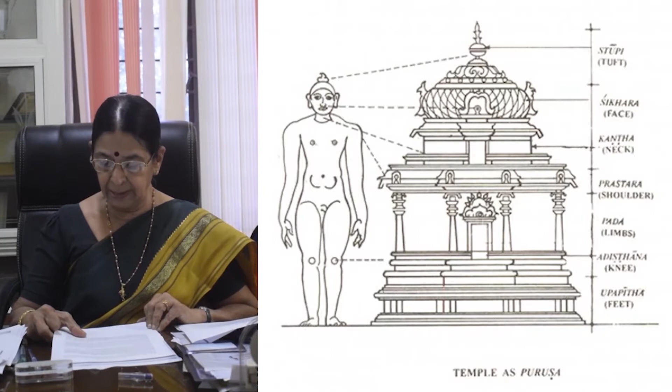The names of the limbs of the body are hence applied to denote the different parts of the temple structure, especially the Srikovil, such as Upapitha, feet; Adhisthana, knee; Pada, limbs; Prastara, shoulder; Kantha, neck; Shikhara, face; Stupi, tuft.

The Garbhagriha contains the life of the temple. It is considered from inside and visualized from outside. The ruling idea of unity is expressed in the harmonious relationship of spirit and body.

Planning of the temple. The temples occupy the central portion of any town planning scheme. In a schematic diagram of a town, as shown in the figure, the town is divided in Paramasayika Padavinyasam, 9 into 9, and the central 9 padams consisting of the Brahmavidi is set apart for the temple complex.

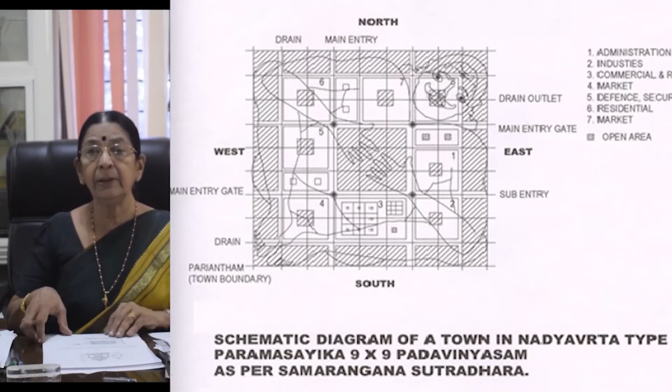There can be seen regional variations in the plan. The fort in Thiruvananthapuram is a good example of a planned city. It is planned in the Asana Padavinyasam, 10 into 10. The entire fort is divided into 100 padams, and the temple of Sri Padmanabha Swami occupies the central 4 padams, as given in the figure.

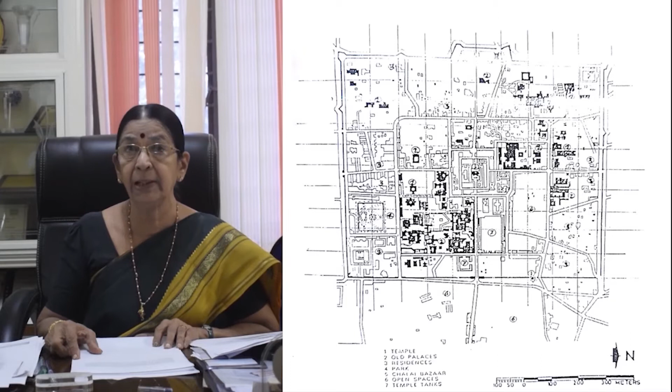Same is the case of Thripunithura. The original plan of Thripunithura is in Asana Padam, with the temple occupying the inner 4 padams. The extent of the temples and the entry points shows regional variations.

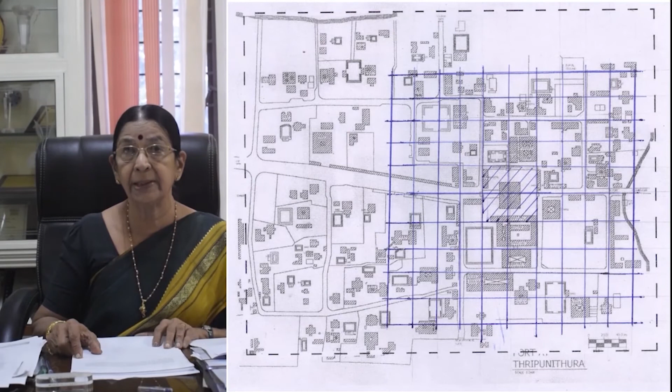In normal cases, there will be 4 entry points at the cardinal directions with the Gopuram, as seen in Padmanabha Swami temple. But in case of the Purnatrayisha temple, there are only 3 Gopurams. The 4th entry is towards the Uttupura on the northern side.

In Kerala, temples are planned as per the technical text Tantra Samuchaya, written by Sri Chennas Narayanan Namboodiripad in the 15th century. This text can be taken as a handbook for construction, where all technical data given in various scriptures are consolidated with the specific requirements of ancient Kerala.

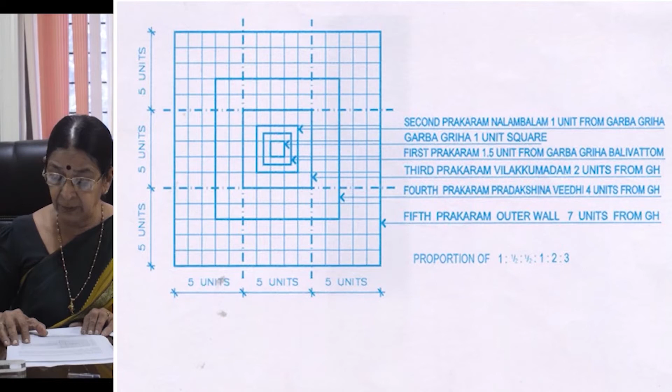As per Tantra Samuchaya, the structural temple is divided into 3 spaces: Antarhara, the inner space; Madhyahara, the middle space; and Bahirhara, the outer space. Antarhara consists of Antarmandalam and Nalambalam and is confined to 3 into 3 Padavinyasam, 9 padams. The Madhyahara space within the Vilakkumadam is confined to 5 into 5 Padavinyasam, 25 padams, and the Bahirhara consists of Pradakshina Veedhi and is confined with 9 into 9. The outer wall, Maryada, is confined within 15 into 15 Padavinyasam as given in the figures.

As described earlier, the plan of a fully developed temple consists of 5 boundaries, Panchaprakarams. The innermost pragaram is the Antarmandalam, which consists of the sanctum and Balivattom, the space confined within the 10 bellicles representing the Ashtadikpalakas and Brahma and Ananda.

The Ashtadikpalakas occupy the respective places in the cardinal points. Of the additional 2 bellicles, one representing Brahma is provided on the eastern periphery away from Ishana, that is northeast, towards Indra east. The second one representing Ananda is provided on the western periphery away from Nirriti, southwest, towards Varuna, west. The 10 bellicles occupying the periphery of the Mandala confirm the concept of the universe and its physical manifestation in the temple design. The second pragaram is defined by Chuttambalam and Nalambalam.

The space within the first and second pragaram is the Antarhara, where entry is restricted for devotees and activities associated with the rituals only will be conducted. The third pragaram is defined by the Vilakkumadam, which is the Madhyahara. The periphery of the third pragaram is also provided with 10 bellicles, which reasserts the concept of the universe. Every temple, including the smallest one, will have all 3 pragarams.

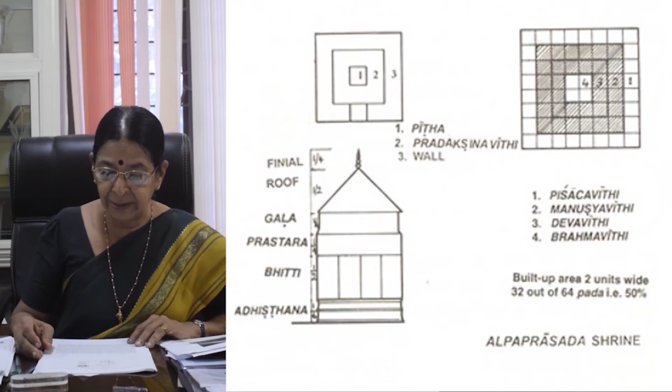The central padam is the Pitham, where the idol is placed. The surrounding Pradakshina consists of one padam width. The remaining one padam is the Bhitti around the inner space. Different padavinyasams are adopted in the planning of Sri Govils, as given in the figure.

Scale of the temple. The standard measurement used in the Vastu Shastra is known as an angulam and multiples of it. Angulam, which is the basic dimension, is decided on the following scale starting from Paramanu.

Paramanu is described as the size of a minute aerosol particle seen in a dark chamber when the sun's rays creep into it. 1 angulam is equal to 2,62,144 times of a Paramanu. 8 angulam makes 1 padam and 3 padam makes 1 kol, which is the standard scale used in Vastu Shastra.

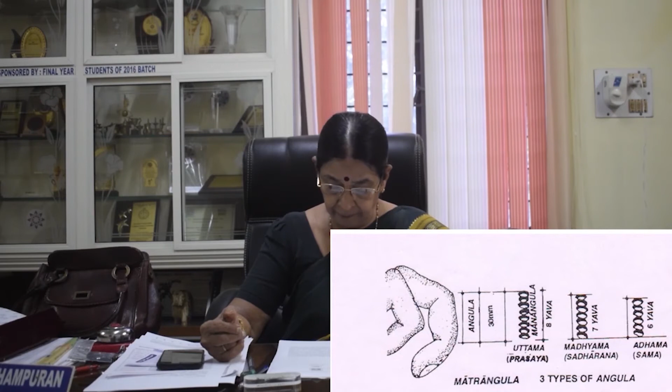In residential buildings, the proportion starts from the angulam, which normally is the measurement of the middle portion of the middle finger of the master. This is known as Matrangulam, proportionate angulam, as given in the figure. This is cumbersome as the measurement of the scale changes from building to building. To avoid this, a standard scale is adopted, which is known as Manangulam, standard angulam.

Legend says that this standardization was effected by Perunthachan, who has inscribed the measurement of 1 kol, equal to 24 angulams, on the 2 jambs of the door of the eastern Gopuram of Lakshmana temple at Moozhikkulam near Perumbavoor. The measurement on the north jamb is followed in the north of Moozhikkulam, and that on the south jamb is followed in the south.

But the scale used in temple construction is that of proportions. Proportionate scale is used in temple construction. The scale used in the construction of temple is related to the size of the idol and the pidam, where the idol is placed, which in turn decides the size of the Garbhagriha.

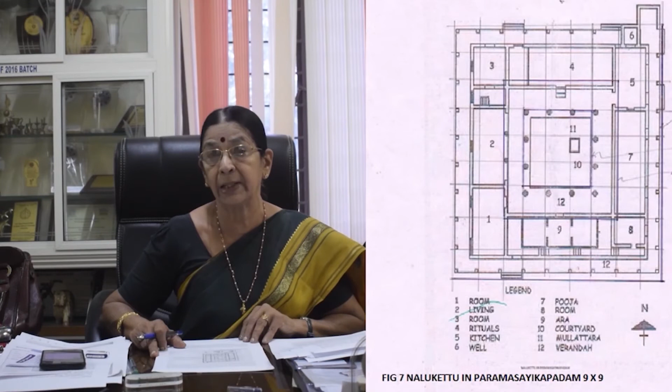The Nalukettu in Tripunithura, Puthen Bungalow, where the Sreekovil of the Paradevatha of the Kochi royal family is constructed in the courtyard of the Nalukettu, is very identical to the Kerala temple. The Nadumittam and the veranda of the Nalukettu consists of the Sreekovil and the Balivattam.

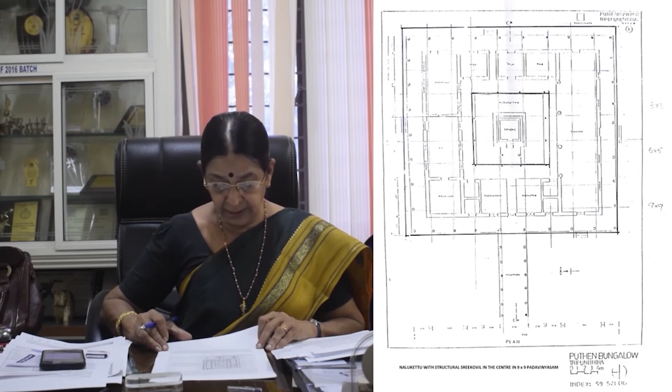The Kizhakkini is provided for the temples of the Upadevathas. The Padinjattini acts as the Edanadi and Valiyambalam. Vadakini accommodates the temple kitchen and space for conducting rituals, and the Thekkini is left open.

The general plan of a temple, as shown, is also in a Paramasayika Padavinyasam of 9 into 9, clearly showing the similarity of temple planning and the residential building.

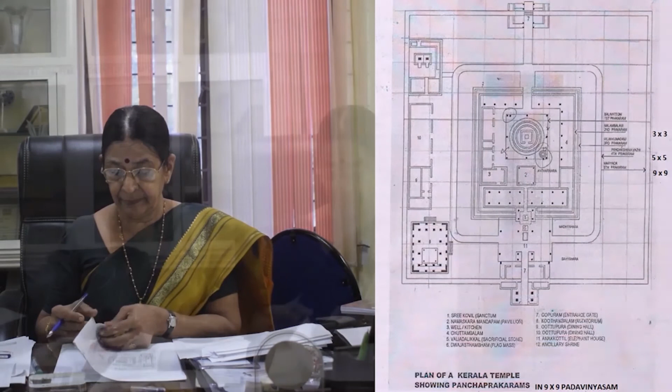As per the Tantra Samuchaya, a large structural temple is divided into spaces. But the structural temple seen in Kerala bears similarity to the planning of the Nalukettu. The general plan of the temple in Kerala with Panchaprakaram comes in the Padavinyasam of 9 into 9, identical to that of a Nalukettu planning. This is the uniqueness of Kerala temple.

Antahara, with the first two Prakarams, is in 3 into 3 Padavinyasam. The third and fourth Prakaram, consisting of Vilakkumadam and Pradakshinavali, is confined within 5 into 5 Padavinyasam, and the fifth Prakara Maryada is confined in 9 into 9 Padavinyasam, similar to a Nalukettu plan.

There are temples in Kerala where the outer wall is not confined within this 9 into 9 Padavinyasam, but extended to a larger Padavinyasam as given in Tantra Samuchayam. Purnathra is one temple where the Maryada is extended so as to accommodate 15 elephants during festivals.

The important architectural features of any temple complex are the Vimanam, or the Sreekovil, and the Gopuram. In Dravidian temples, the Vimanam as well as the Gopuram are important structures, for example the Brihadeshwara temple and Madurai temple.

Regular cement takes 28 days to make an airstrip. This one just took 4. Yes, it is the technology of the future, brought to us today by Dalmia Cement. And I'm building my house with the same. Dalmia Cement, future today.

I'm a forest ranger and I don't allow any interference in the jungles. But this wildlife corridor was needed, so we built it with the world's greenest cement, Dalmia. And now I'm building my own house with the same. Dalmia Cement, future today. An 8-foot slab of concrete that can take a load of 500 tons, moving at such

speed. Yes, it's the technology of the future. Brought to us today by the pioneers of sleeper cement, Dalmia. And I'm building my house with the same. Dalmia Cement, future today.